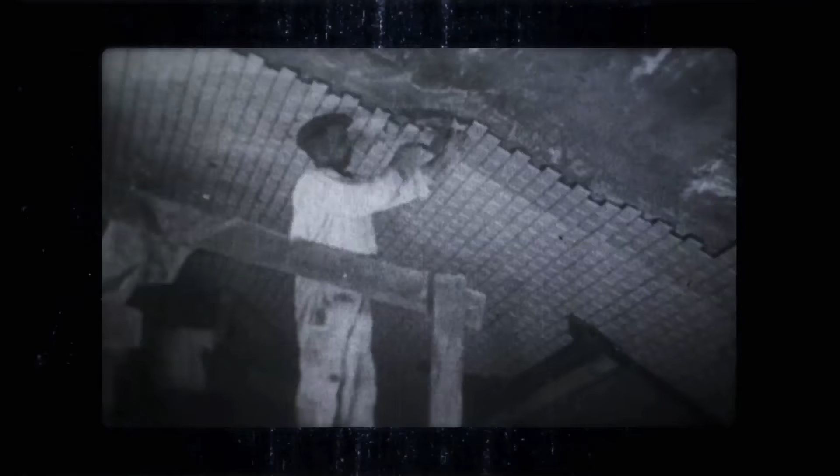It owes this uniqueness to Parisians, who have held it dear since it was first created in 1900. Designed by visionary engineers such as Fulgence Bienvenüe, the father of the metro, and realized in an era where everything was possible, this megastructure has marked the capital with its imposing viaducts which crisscross the Seine. But how did they achieve such feats?

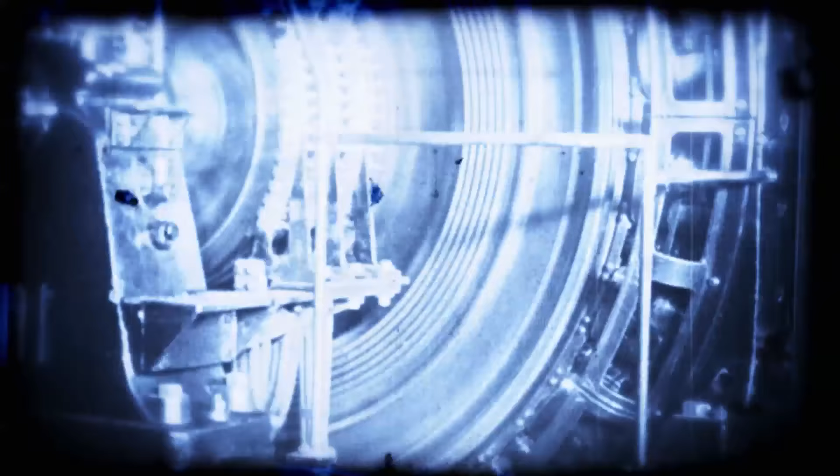The network has always benefited from the most innovative technologies. From the first wooden tunnels to chambers submerged in the Seine by freezing the ground, the construction, which began at the end of the 19th century, disemboweled Paris and boosted its performance. As for the 400 trains, today they look nothing like the original wooden wagons. They are increasingly faster, more secure, automated and interconnected. The network has succeeded in its technological gamble and brought its historic lines into the modern age.

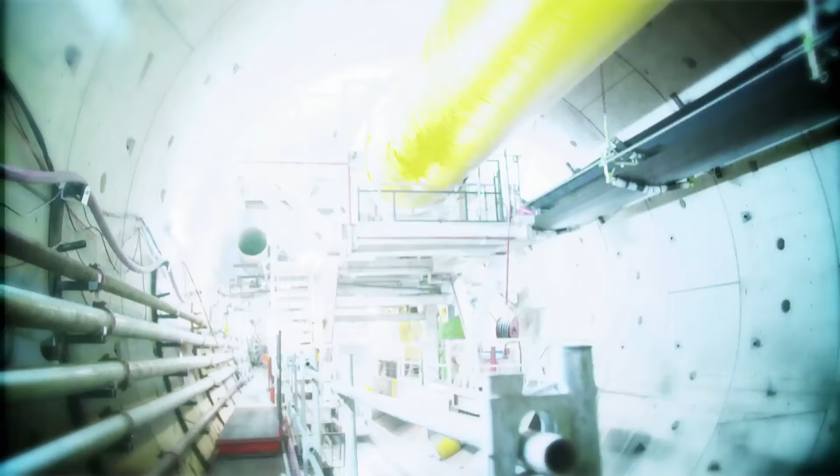Today, the network continues to grow, but the building techniques have changed. The Paris Metro uses the most innovative methods to continue its growth. These include giant tunnel boring machines capable of digging more than 30 meters deep.

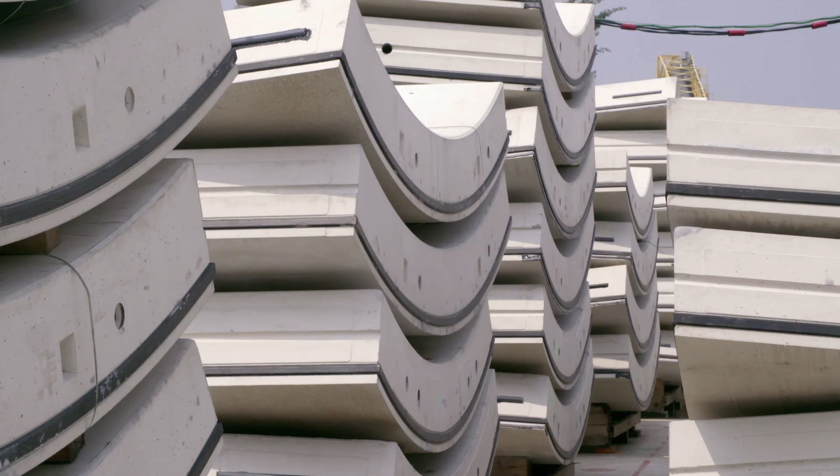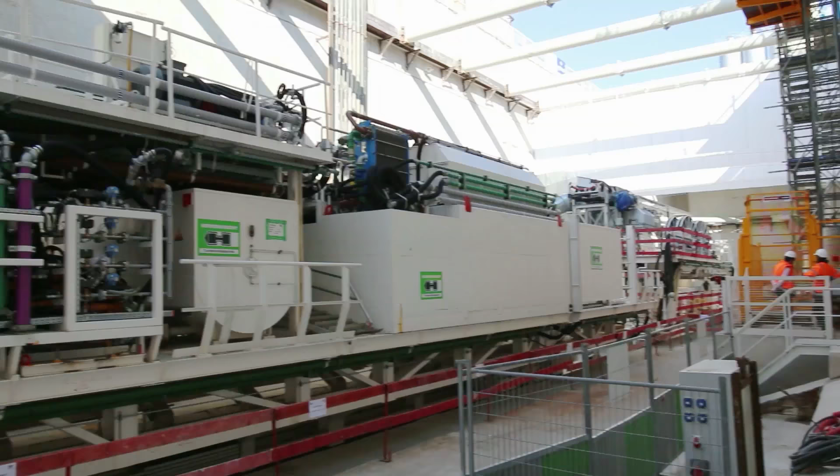We are in Saint-Ouen, on the site of the Line 14 extension, a titanic construction costing nearly €1.5 billion, situated in the heart of the city. Here, revolutionary techniques are used, making it almost invisible to the city's population.

The project will add 6 kilometers and 4 stations to the existing line, linking the Saint-Lazare station and the Mairie de Saint-Ouen station.

25 meters below ground level, the tunneling machine, Seine, is hard at work. It has covered 400 meters so far. Its aim is to create a new section towards Mairie de Saint-Ouen station.

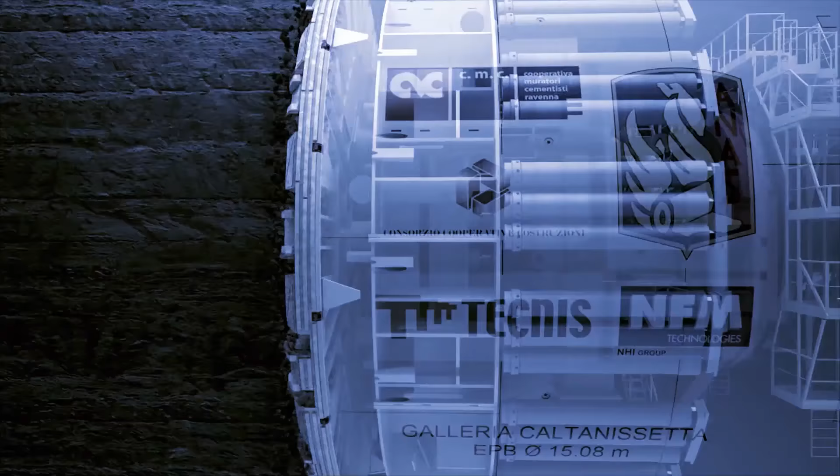The tunnel boring machine, at 100 meters long and 9 meters wide, is able to exert 7,000 tons of thrust against the wall it devours. Completely automated, the Seine can dig and construct the tunnel at the same time. At the front of the machine, the head, equipped with its numerous teeth, operates on the rock exactly like a drill bit. The cutting head eats away at the earth. The rubble is then routed outwards with the help of an Archimedes screw, a giant feeder screw.

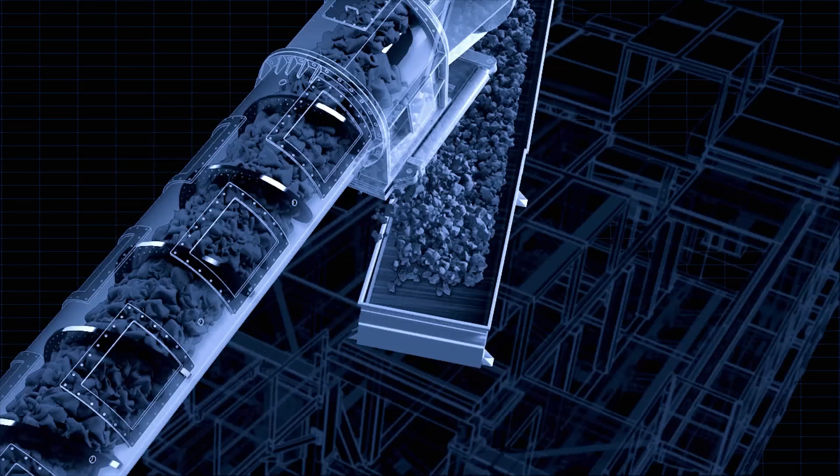The debris, saturated with water, is carried outside of the site on a conveyor belt. Stored in a reservoir, it is then taken away in lorries.

At the same time that the earth is removed, the voussoirs which will form the tunnel walls are lowered into the starting well. They continuously supply the work of the boring machine.

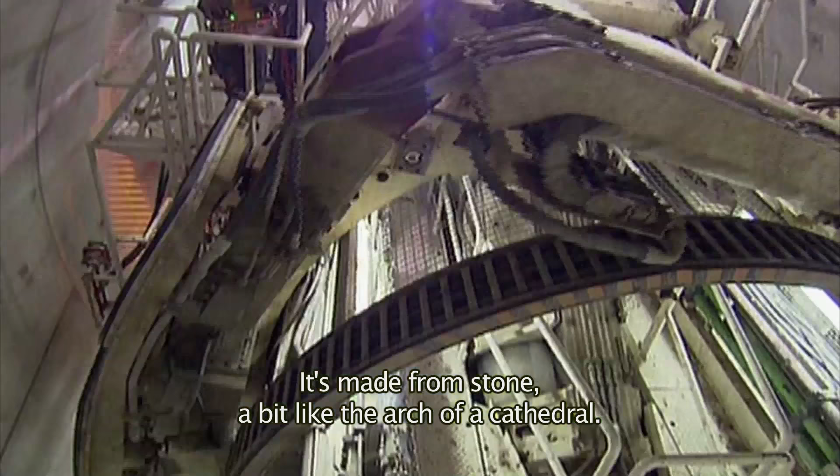Following the advancement of the tunnelling machine, a mechanical arm places the voussoirs one by one in a precise order. Assembled together, they will form the structure of the tunnel. The Romans used stone voussoirs to construct their arches. Like a giant puzzle, these prefabricated concrete parts weighing 6.5 tons fit perfectly together to form watertight walls.

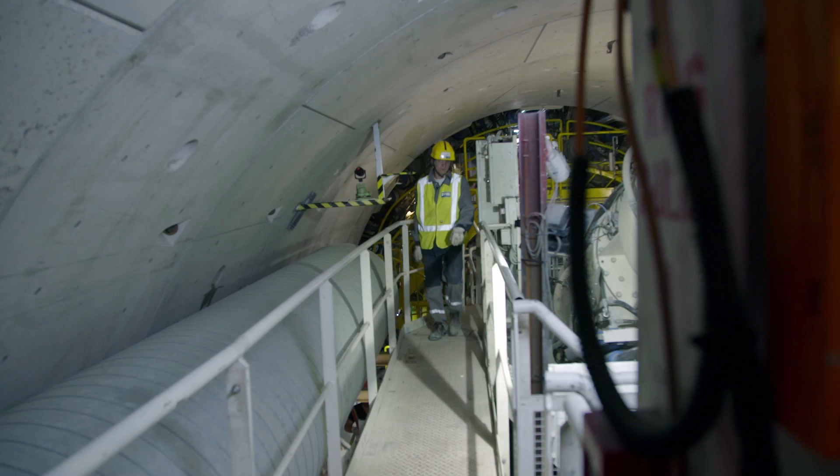On this extension of line 14, it will take 7 voussoirs to form a tunnel ring.

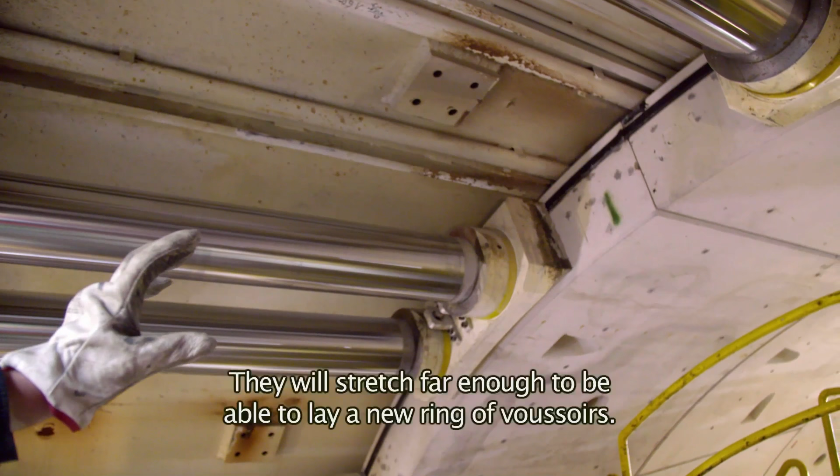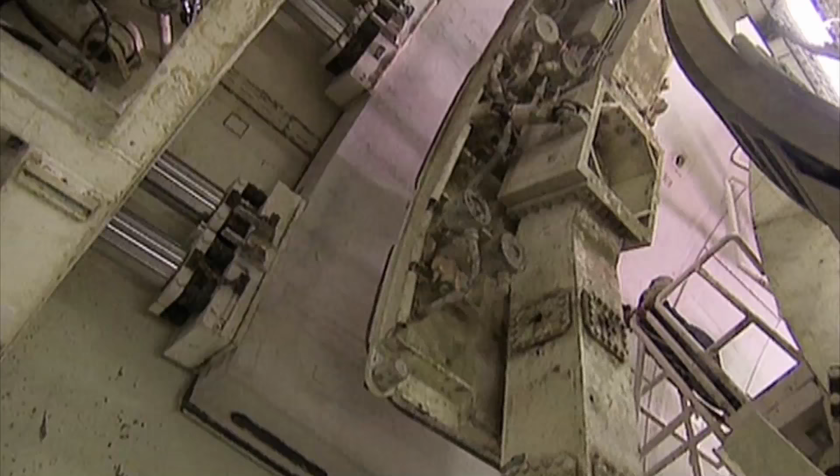No propulsion is required to move the machine forward. These hydraulic jacks allow the machine to lean against the voussoir that it installs and apply pressure which moves it forward. The tunnel boring machine at Saint-Ouen advances 200 meters a month towards its final target, situated more than 5 kilometers away.

The speed must be adapted according to numerous parameters, including the type of earth and the diameter of the borehole, similar to a drill that you don't want to overpower for fear that it might jam.

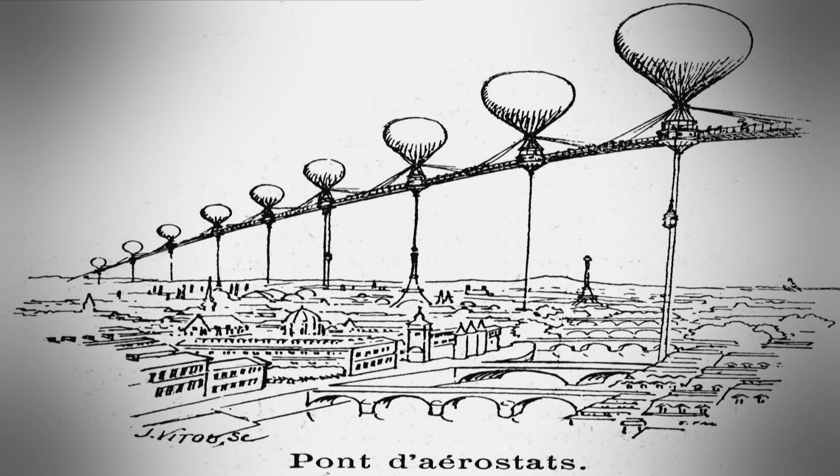The inventiveness of proposals for Parisian transport from visionaries and other passionate people is limitless. Airways hung by giant balloons, a suspended bridge between the 2 Eiffel Towers, an aerial tram passing over the city. Anything seems possible. The works of author Jules Verne seem to have inspired many of the projects, such as that conceived by a certain Monsieur Olivier, who in 1878 proposes an aerial tram passing over buildings in order to facilitate road crossings.

This goes on for 40 years, with no results. The Parisians will have to be patient.

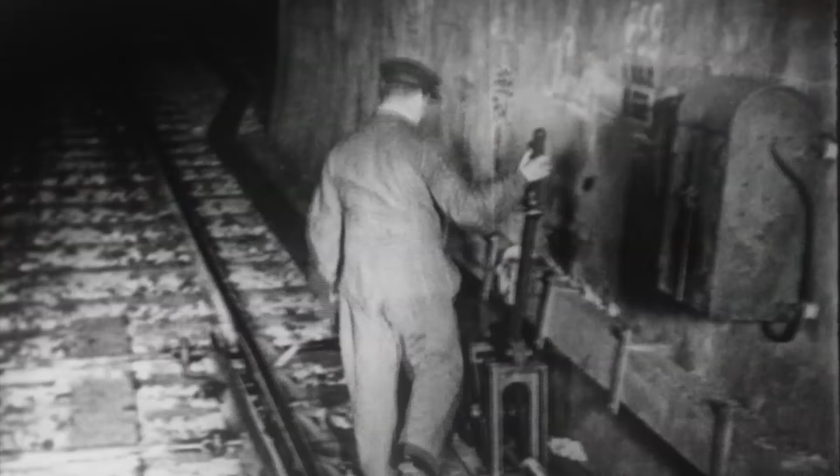From the outset, the design brief of the construction of the Paris Metro specifies that it will be, for the most part, subterranean, even if it will also have to cross the Seine by metal bridges.

As for the trains, they will be electrically driven and must not exceed the size of 2.4 meters, which would inhibit the running of normal trains.

Fulgence Bienvenüe is the champion of the underground, but the Paris Metro is also made up of some spectacular constructions, incredible technological prowess for the time, and true artistic masterpieces.

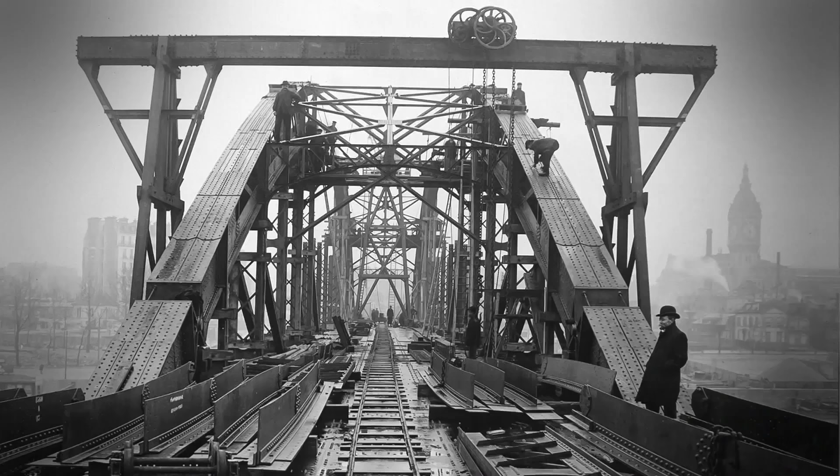In order to avoid interfering with river traffic, the navigation service demanded that it should have no supports in the middle of the river.

Situated 11.3 meters above the level of the Seine, the Austerlitz viaduct is made of steel. It consists of two large parabolic arches with three main joints, one at the top and two on either side near the riverbanks. The deck, which is 8.5 meters wide, is suspended from the arches by 16 supports in its center and 4 supports at its ends.

To withstand wind force, the suspension supports are connected by crossed structures. To reinforce the structure, the arcs themselves are also connected together.

The selected project, therefore, outlined a viaduct with a single span of 140 meters, beating the 107.5-meter-long Alexandre III Bridge, which was until that point the longest in Paris.

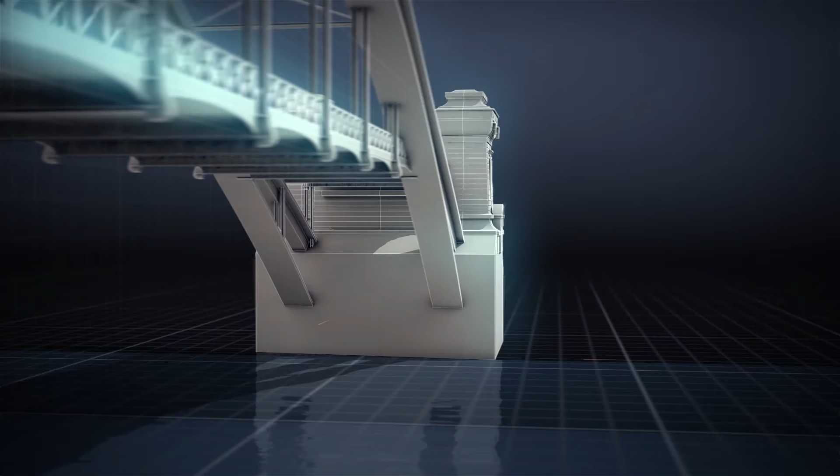On the banks, the viaduct arches rest on stone abutments, which are 22 metres long and 18 metres wide. Each of these blocks is surmounted on two 15-metre-high masts, which frame the deck of the bridge. A work that is truly extraordinary for its time.

In July 1906, the construction is finally completed. Line 5, which links Gare de l'Est to Gare d'Austerlitz, is in service.

It is one of 6 lines which make up the initial project, but already a second stage of works is planned. For the designers, the metro must be for everyone, and no person should be further than 400 metres from a station. It is for this reason that the first line to be constructed consists of 18 stations for only 11 kilometres of track. It is the transversal line from east to west, which departs from Porte de Vincennes to join Porte Maillot. It runs along the Seine for nearly half of its length.

The construction for Line 1 begins in February 1899.

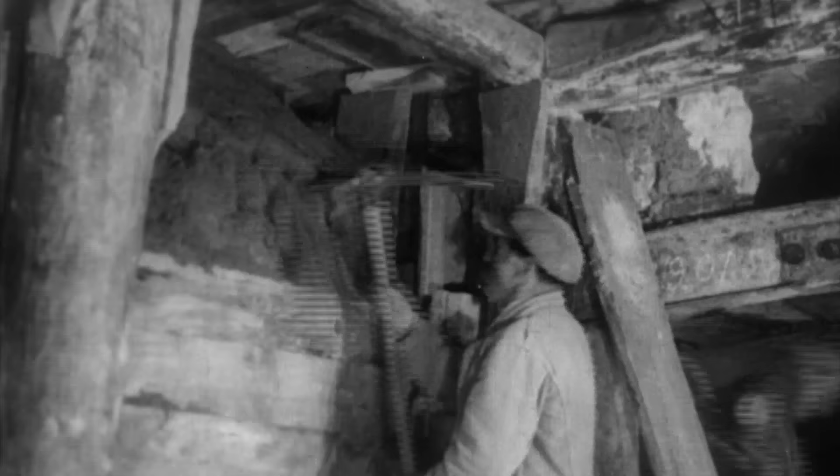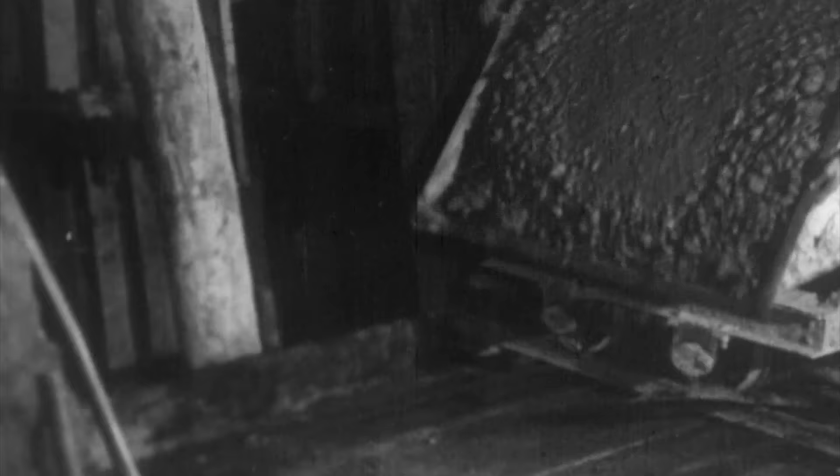This technique is used by all contractors in the construction of railway tunnels in particular. As in the mines, the digging is done by hand with a pick and shovel, grueling work that is carried out in extreme conditions. All the rubble is removed from the tunnels in wagons and transported to the surface. Some is used to refill Parisian quarries. As for the shafts, they are supported by enormous wooden beams, which also serve to create the shape of the future tunnel. Finally, still by hand, the vault is constructed from stone blocks, a work worthy of the construction of the pyramids.

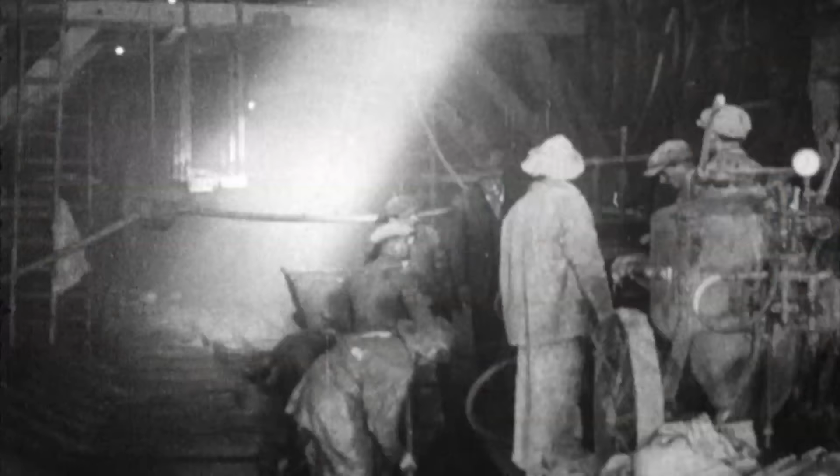In reality, the metal shield would not be used much on Line 1 because it is very slow, difficult to put in place, and stops as soon as it encounters a rock that is too hard. At the time, it was even sometimes necessary to dig by hand to move it forward in waterlogged terrain. These are the voussoirs placed one by one to create the tunnel ring. They are cast iron and positioned using a manual system. They give the tunnel its final shape. The shield concept truly is the ancestor of the modern tunnel boring machine, but this technique will take decades to be properly developed.

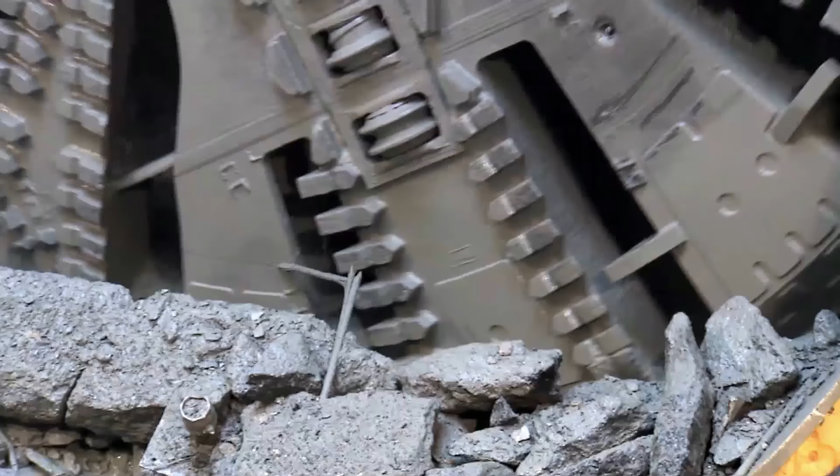It will take a century for a tunnel boring machine to be used again in Paris.

Today, it is hard to imagine the busy Rue de Rivoli in this state, and yet it is the hell that Parisians will live with for 18 months.

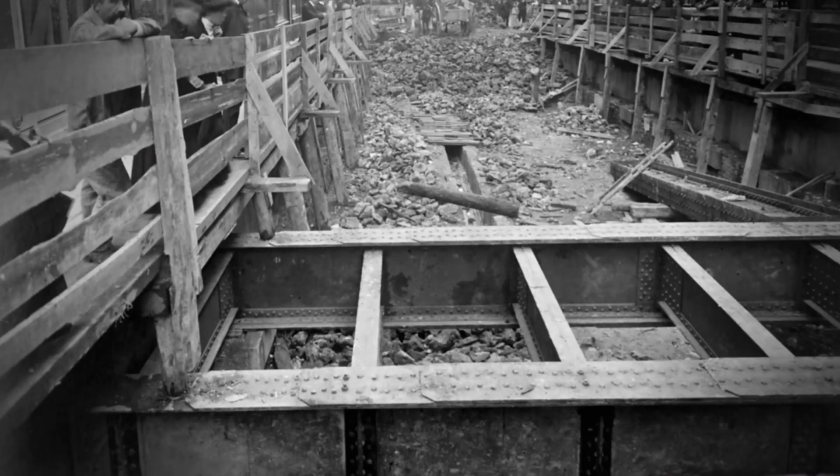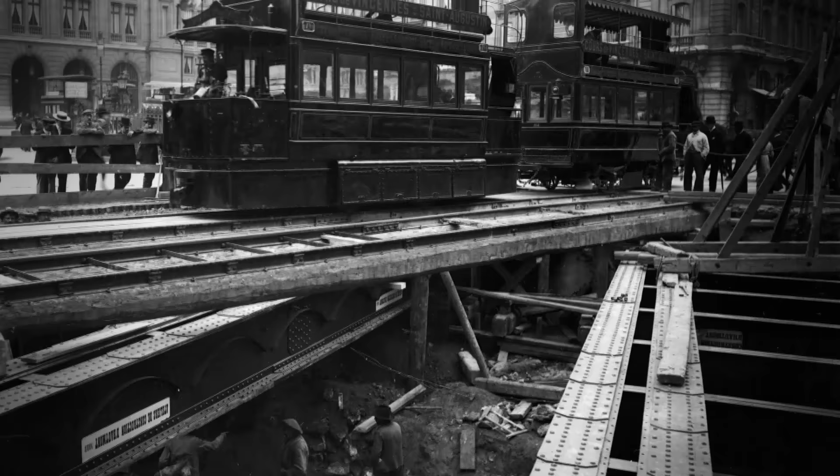This technique will be used near the Seine. Dug as shallow as possible to avoid leaks, the top of certain stations is sometimes only 60 centimeters from the wheels of the cars passing above.

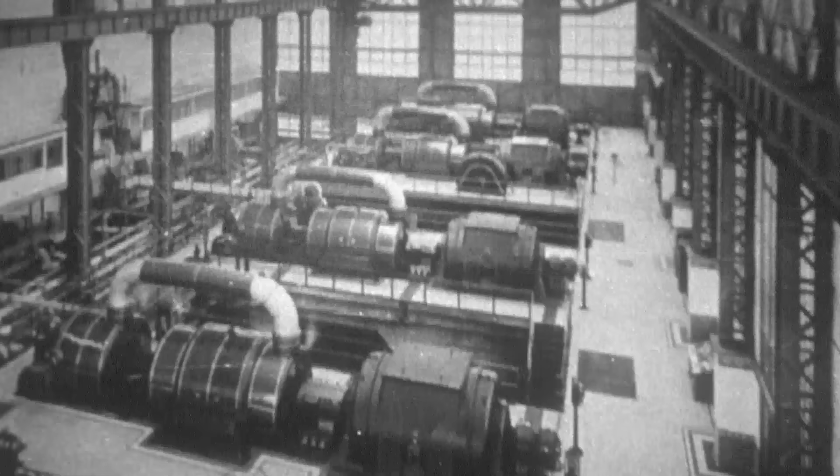The most advanced technologies were used in the electrification of the network. 2 coal factories were built to provide enough energy for this new means of transport. This requires colossal investments which already combine public and private money. It is the CMP, owned by Baron Empain, one of the financial giants of the 19th century, who takes on this formidable gamble.

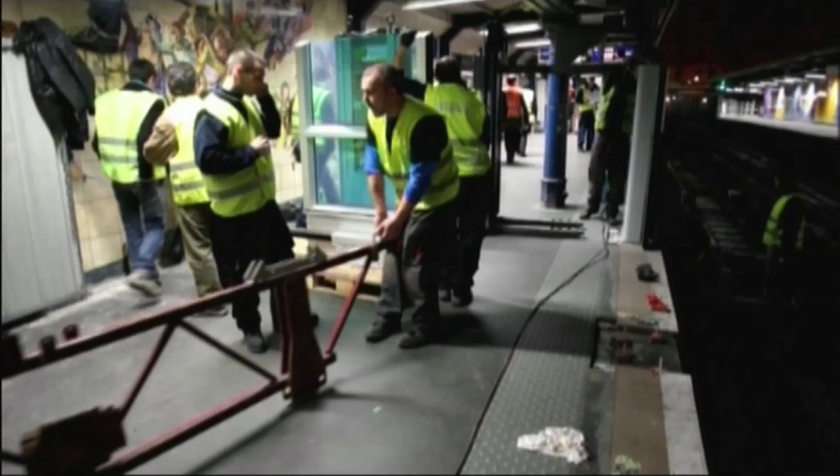In 2011, to better meet a growing demand, the traditional metro with a human driver is replaced by a completely automated line. The work was done at night without major interruptions to traffic. It was a world first.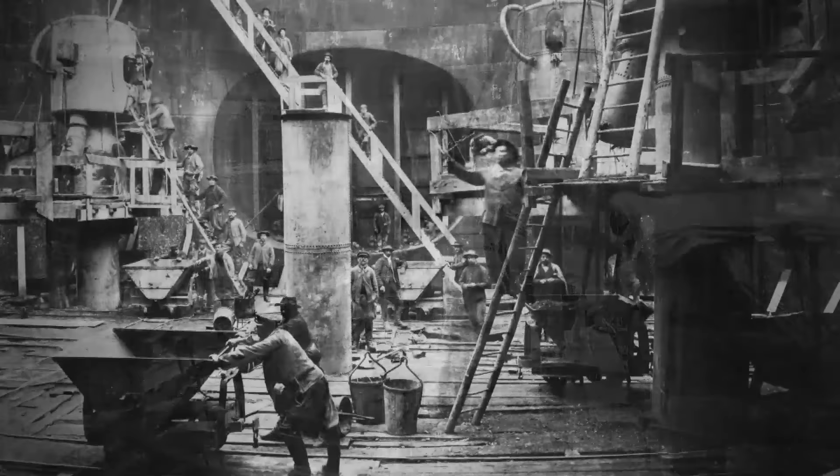Thanks to this success, he will be entrusted with an even more unbelievable mission: the first crossing under the Seine River, between the stations Châtelet and Cité. These 2 stations make up part of Line 4, around 11 kilometers long, running from Porte de Clignancourt to Porte d'Orléans.

They decide on chambers buried in the riverbed. Construction begins in 1905 and promises to be spectacular. There will be 3 large chambers for the larger branch of the Seine, covering 122 metres, and 2 for the smaller branch at 41 metres. The 5 chambers, which will be submerged in the river, will be assembled on the Quai de Tuileries, where the engineers will create their innovations.

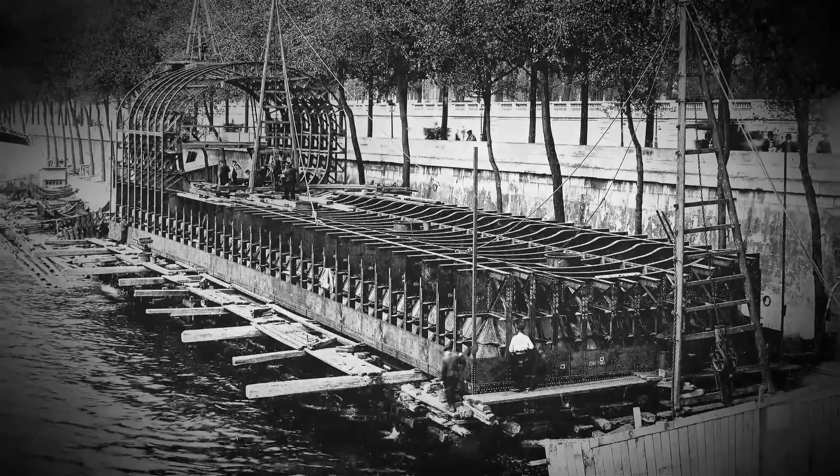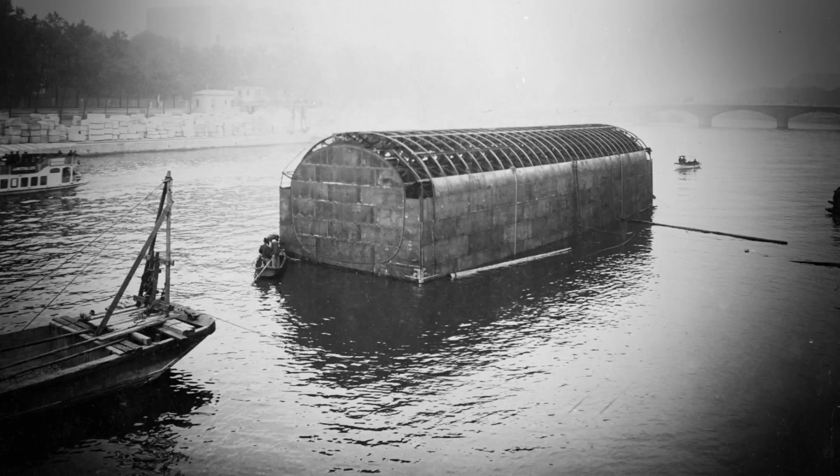Each chamber is composed of a cast iron base housing the 2 future tracks. The whole structure is surrounded by a double-layered wall made from metal. The chamber rests on a base shaped like a knife blade, 1.8 metres high. Between the 2 walls is an empty space, which will become a workspace where the builders operate. The chamber, which floats on the Seine, is then towed to its future grounding place.

After finding its ideal positioning, concrete is injected into the metal double wall, creating a watertight sarcophagus. As promised by the contractor, the construction site, despite its size, manages to avoid interference with the swallows and their passengers passing along the Seine.

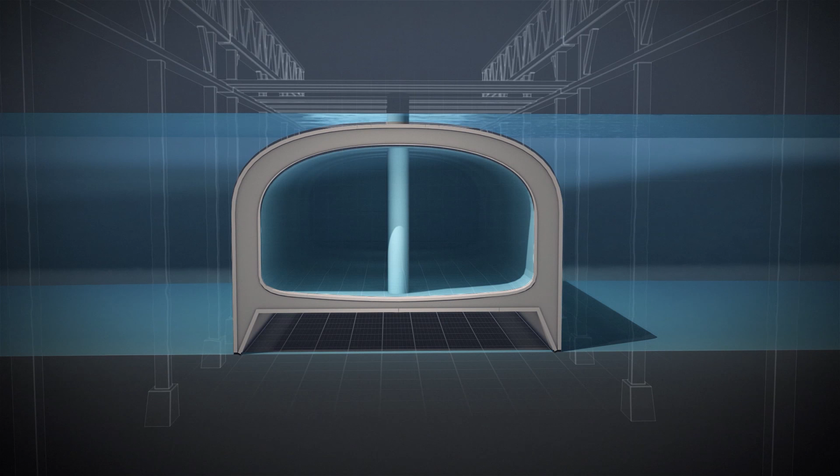Under the weight of the concrete, the chamber falls gently. Once in place, the water inside the work chamber is pumped out. The main chamber is weighted down to keep it in place at the bottom of the river. Through chimneys, compressed air is sent into the work chamber, increasing its watertightness and allowing the builders to go down and dig under the metallic structure in order to sink it to the desired level.

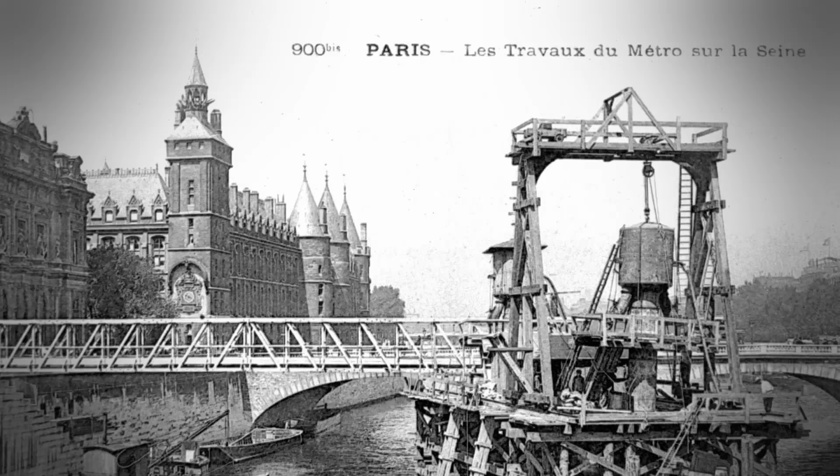Working in extreme conditions, these specialized builders, called tubists, must, like underwater marine divers, make decompression stops when coming back up from the work chamber, 15 meters below the surface.

Strikes, which were rare at the time, will mark the history of this abnormal building site.

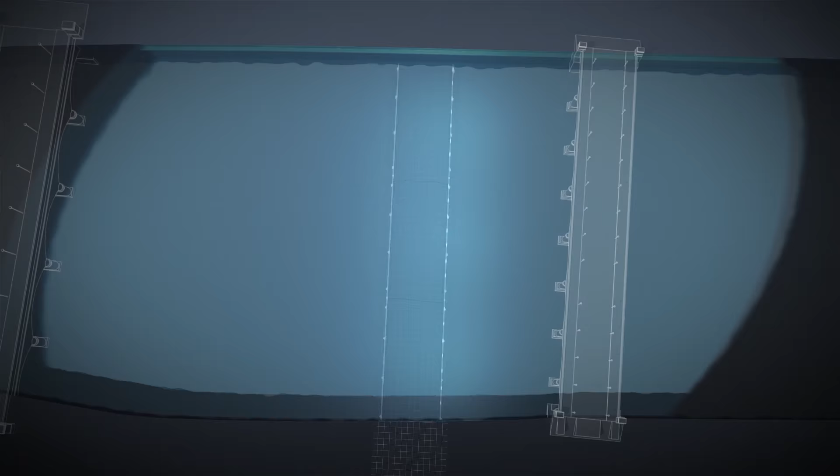They are then joined together to form a single tube. The work chambers are filled with concrete and the trench is filled to ensure the structure is locked in place. The tunnel is complete. The water is then pumped out and the workers can finally access it. This part, the most dangerous, takes place without any major problems, but the same cannot be said for the chamber under Ile de la Cité.

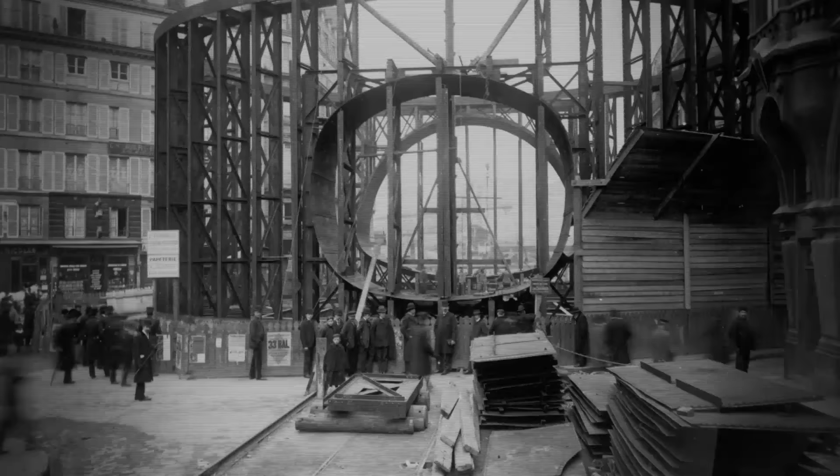The stations Cité and Saint-Michel, situated on the mainland, must also be buried. Once again, the sinking technique will be used and the builders will go down into the work chamber to pick away the waterlogged earth from below. A colossal job, especially when you see the images of these enormous steel hulls that gradually disappear into the ground.

But the construction is not finished. A new difficulty stands before Léon Chagnaud. They have to pass beneath the railway line connecting Austerlitz and Orsay without it collapsing.

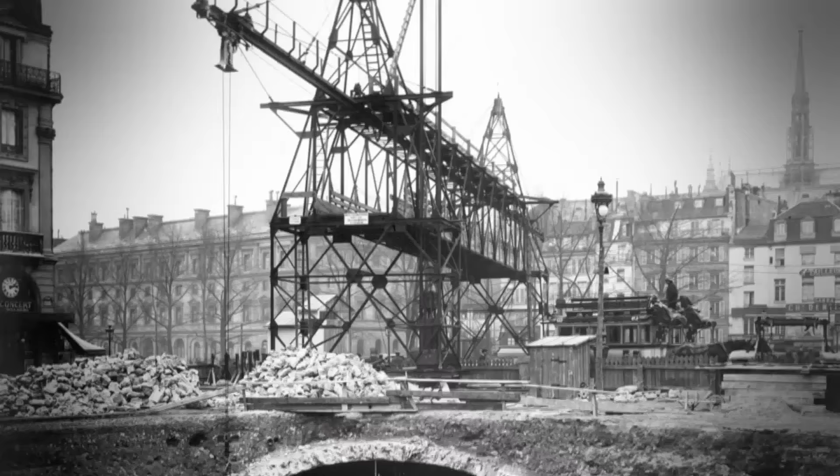This freezing technique makes it possible to carry out dry work in water pockets and so enables the digging of more stable ground. For this, 2 refrigeration plants were built along the Seine. From there, pipes circulated salt water cooled to minus 24 degrees.

The digging shaft passes beneath the railway line, which links Austerlitz and Orsay. So that the tunnel works did not endanger the tracks, the ground is frozen by inserting 24 refrigerated pipes, which went 14 meters deep. The volume of earth to be frozen is considerable, more than 2,000 cubic meters. This technique is so expensive and so complicated to develop that finally only 14 meters are treated.

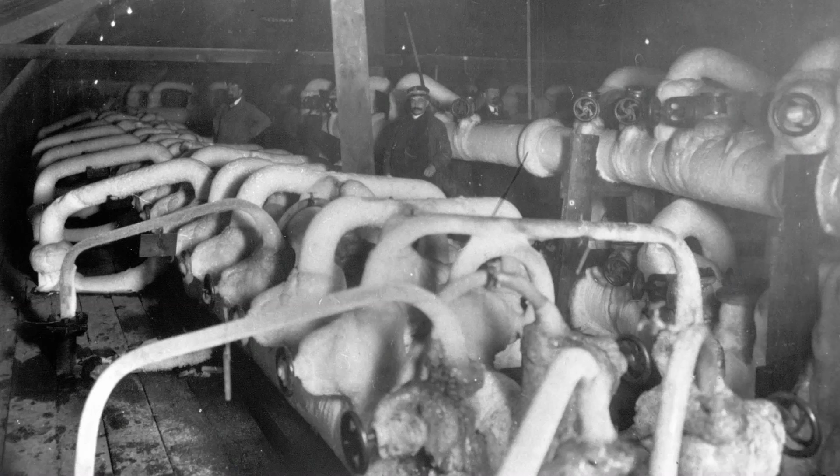After 40 days, the ground is sufficiently frozen. The freezing works so well that the builders, who work with picks, have difficulty digging. The work is reaching the limits of what humans can achieve, and the construction can only take place at night when the trains do not run.

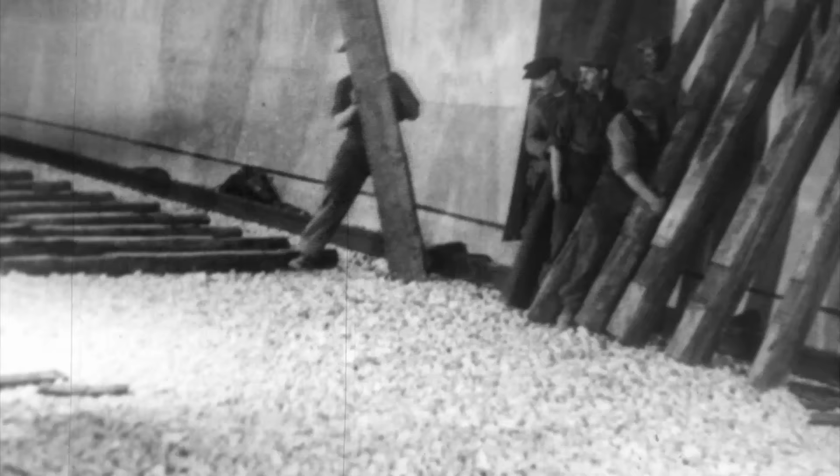In 1909, after 4 years of hard work, the gargantuan construction of the Seine crossing is complete. Up to 700 workers were employed at one time. The General Inspector, Fulgence Bienvenüe, comes to inspect it. His dream has become a reality.

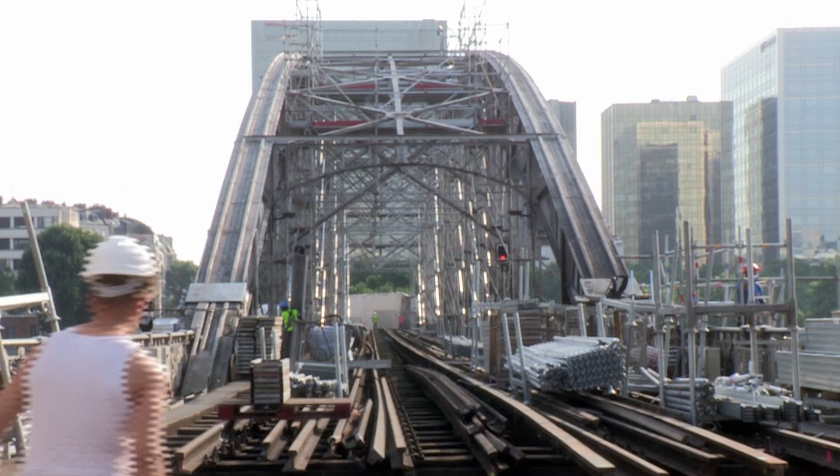Today, the 14 existing lines are subject to wear and tear and various incidents. This enormous structure is therefore constantly monitored, and everything possible is done to keep the lines running. Some, built at the very beginning of the 20th century, are totally renovated, respecting the spirit of their unique heritage. This is the case particularly of the aerial lines, whose metal structures have for decades met the expectations of the engineers who designed them.

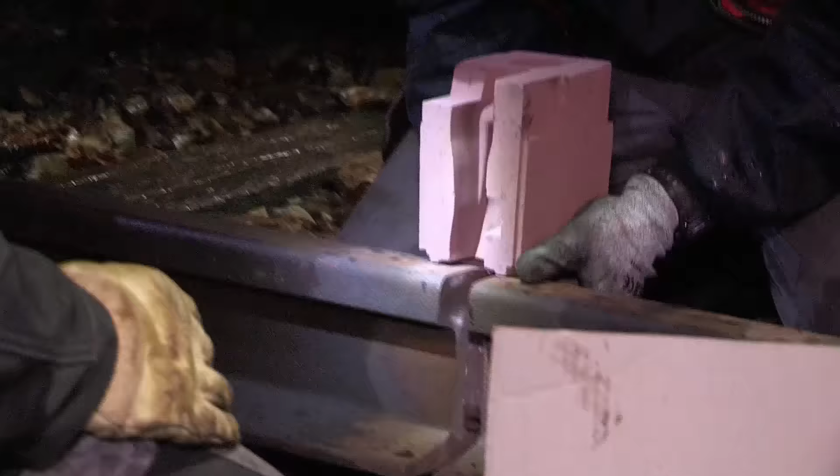This is why the metro, now indispensable to Parisian life, never completely sleeps. Each night, 2,000 agents work to maintain the tracks, which zigzag through the bowels of the city. The RATP workers must work fast, as they have to leave their work sites before 5 o'clock in the morning.

Technicians today still use techniques developed by generations past. To assemble the rails to be replaced, they are welded together with the help of a sort of small portable foundry. This is a technique used even in the 1930s.

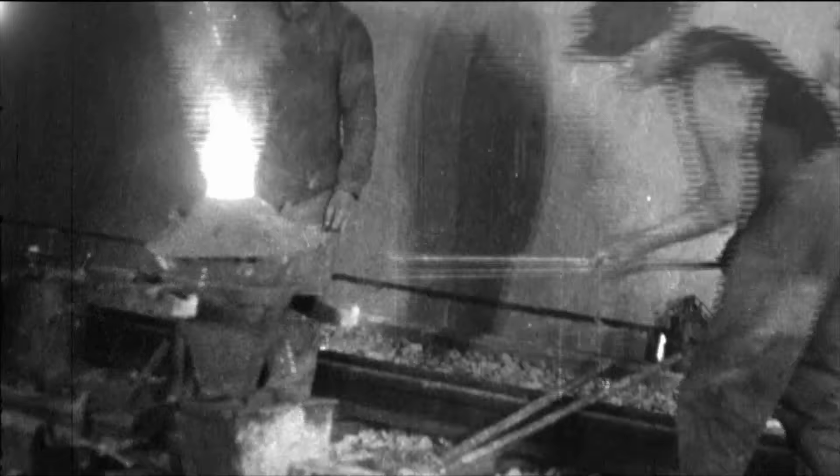The hundreds of metro trains travel tens of thousands of kilometers each year, requiring colossal maintenance.

Attention à la rentrée de la rame 46, voie 5. Ok Nico, voie dégagée, tu peux y aller.

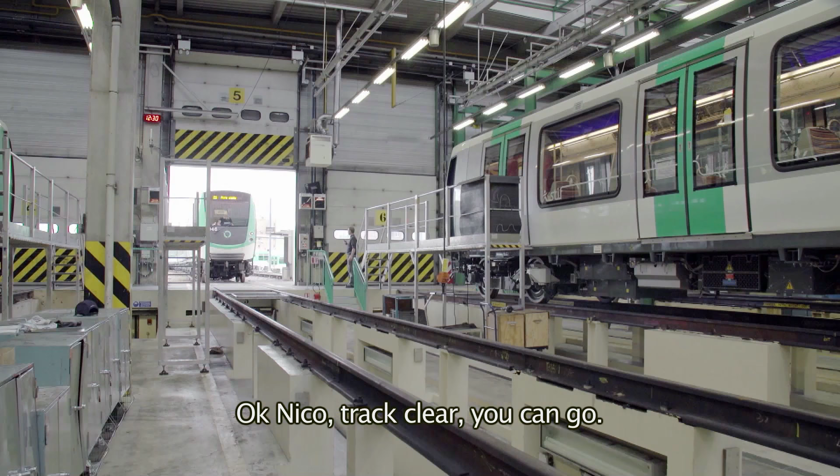Each line has its own maintenance workshop. We are in Bobigny. All the Line 5 trains come here to undergo maintenance, tests and repairs at least 5 times a year.

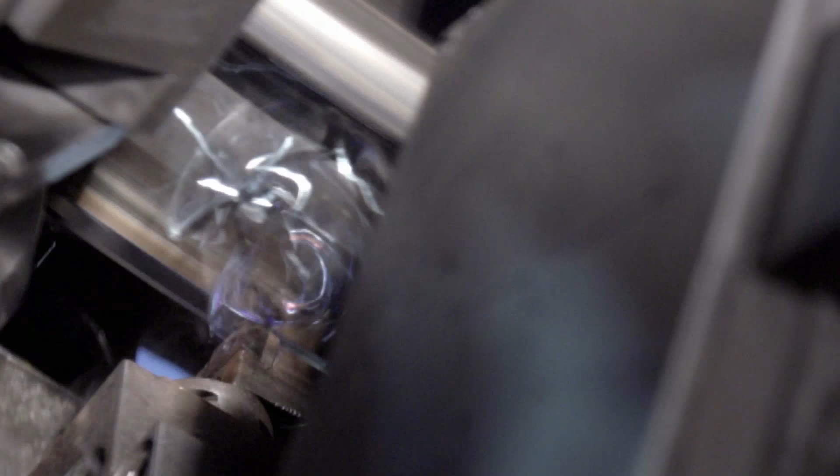Like with car tyres which wear out and become misshapen, the metal wheels of the metro trains require a reprofiling every 200,000 kilometres, or 3 years of use. It is a way of improving the comfort of the passengers and also ensuring optimal safety by gaining adhesion.

Here the cars are checked from every angle. One of the main advantages of this state-of-the-art workshop is the possibility of working on the bogies, which include the engine, the undercarriage and the axles, and which weigh more than 7 tons.

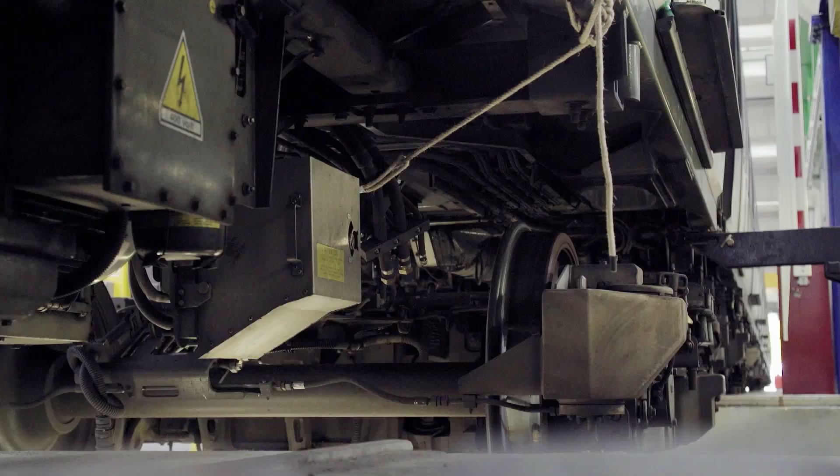Huge hydraulic cylinders separate the wagons from the bogies, an exceptional system which allows them to be repaired or changed.

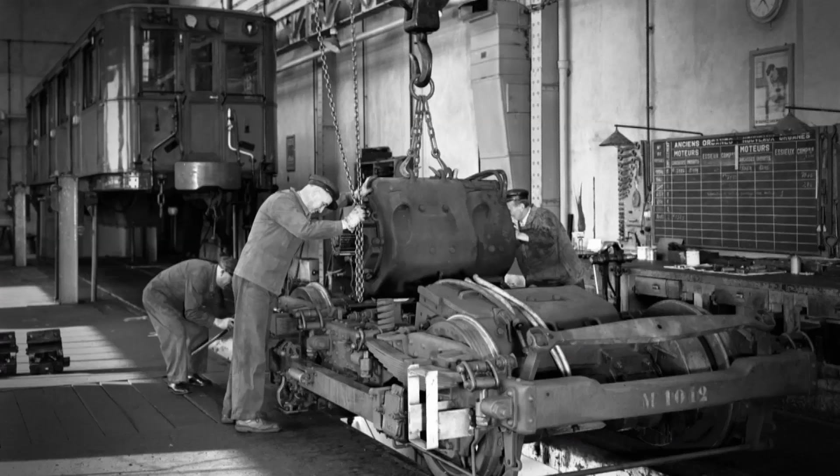It is a long way away from the manual workshops 50 years ago, where adjustments took forever. Technology has revolutionized the RATP maintenance workshops. But today, like yesterday, nothing is left to chance here.

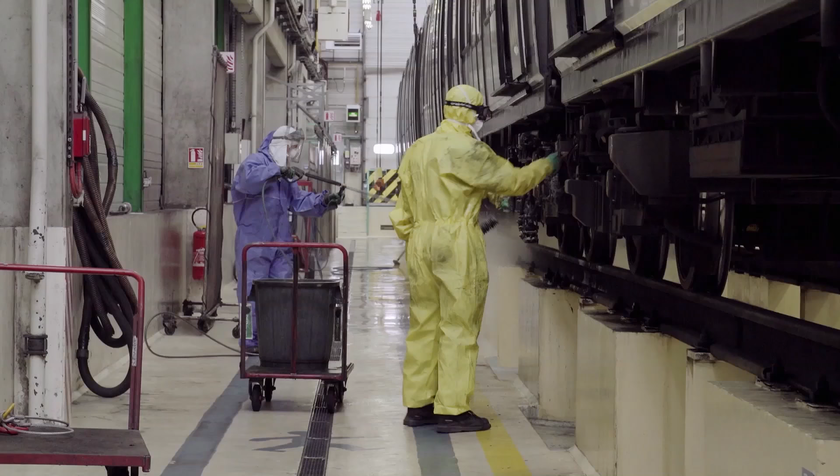An operation that is required to facilitate the technician's diagnostic, who check each part, and also to avoid any possible accidents where the oil might risk setting on fire due to the heat.

There have been few fires, sometimes with unexpected causes, since the metro opened. The most tragic took place just after a few years of use, on the 10th of August in 1903.

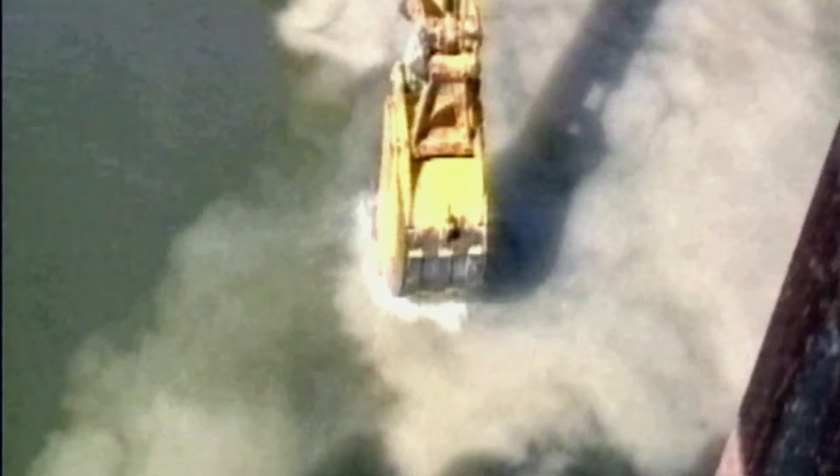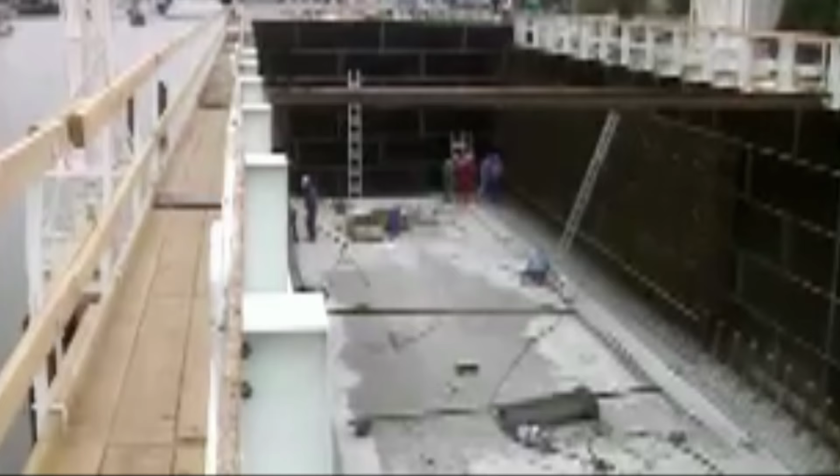Excavators with giant arms are used to make a huge trench, 14 meters wide, in the riverbed. The 4 chambers are 34 meters long, 6 meters high and 9 meters wide, made of prefabricated concrete. They are constructed directly on site.

Submerged slowly and under heavy surveillance, they are then directed towards their grounding site. Positioned in line with the trench, the chambers disappear into the Seine.

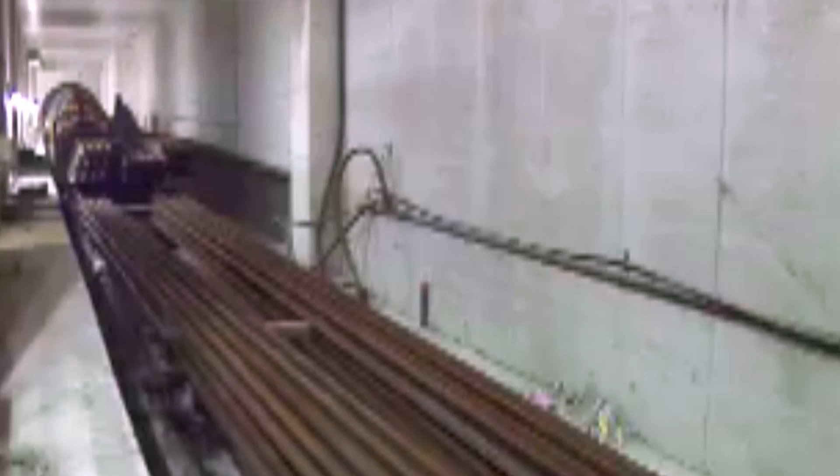Reaching their final placement, they are then covered with earth. Joined together, they form a new passage under the Seine.

Nearly 20 years later, Line 14 opens. New extension works begin.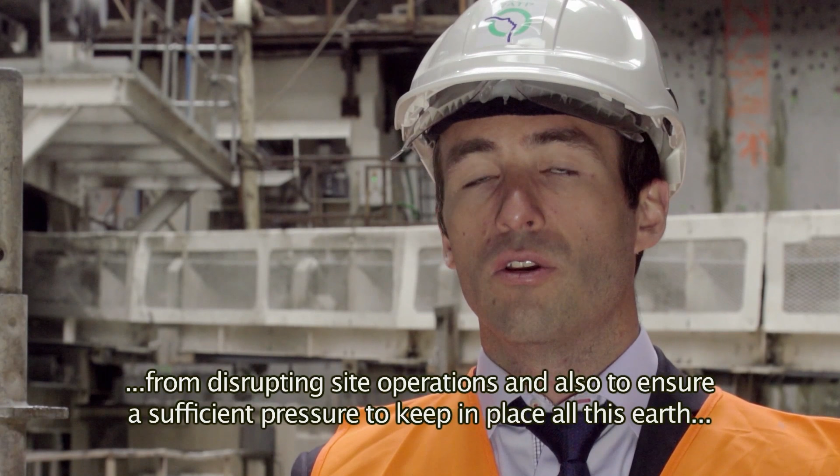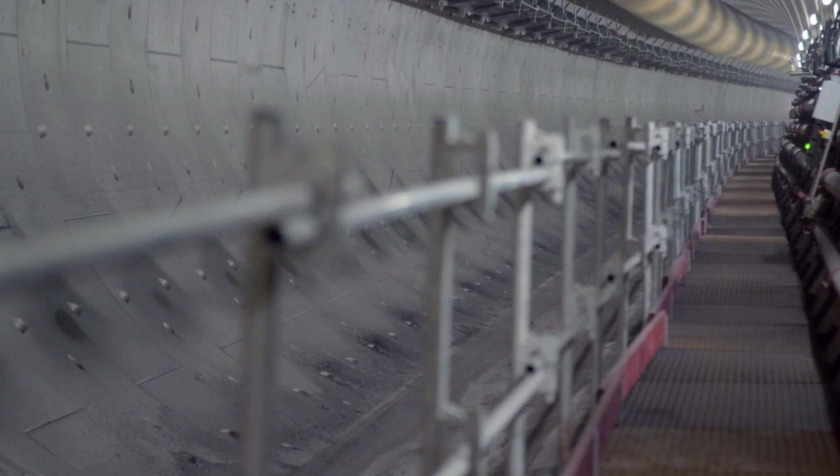Digging with a tunnelling machine has a number of advantages for the use of the future line.

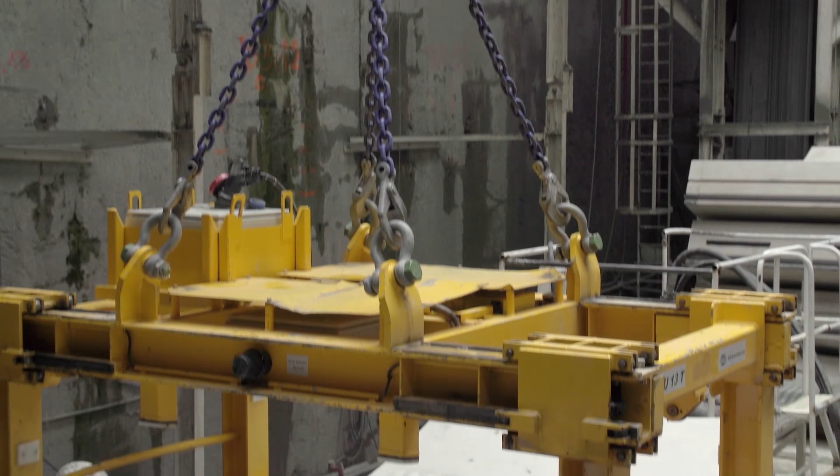The Line 14 extension will open in 2019. After this, it will see other additions, such as an extra station in the north, in Saint-Denis-Pleyel, and an extension of around 15 kilometres in the south, joining Orly Airport. These two new stations will be connected to the whole Grand Paris Express network. This is the big idea of the Grand Paris network, to multiply the connections within the existing network. This will be the case for 75% of the new stations. Quite an accomplishment when you consider the importance of the construction, which is beginning.

The Grand Paris Express is a new transport network. At 200 kilometres long, it is as long as the current Paris Metro. The 4 new lines are completely automated, travelling up to 120 kilometres an hour between 68 new stations. A circular network which joins France's main regions and aims to decongest the existing network. It was time. The Paris Metro megastructure began to seize up. Another way had to be found.

A circular network for skirting around Paris and saving time. For the Line 15 South, which will link the west and the east of Paris without passing through the capital, 13 architects have designed 16 new stations. They no longer seek to hide them. They are thought to be true living spaces, making their mark on the heart of the city.

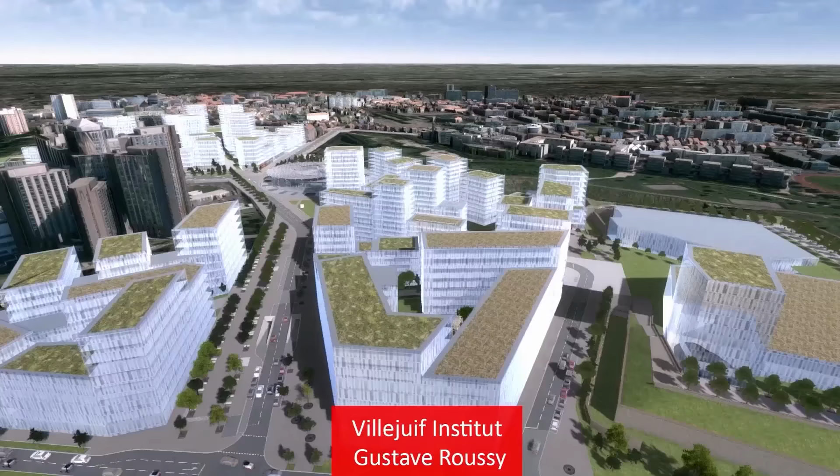The first works have begun, and Line 15, which will surround Paris, will be completely finished in 2027. But this is not it, as numerous extension projects on existing lines have already been planned. The network must respond to the growing Parisian urban area, but also to its usage, which increases by 3% each year to soon reach 1.5 billion passengers transported.